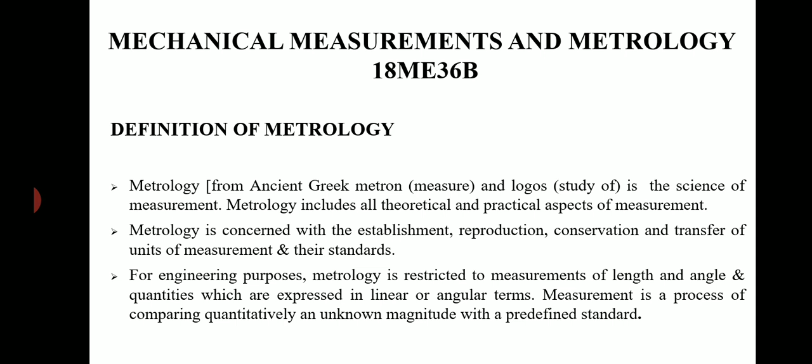Objectives of metrology: to provide accuracy at minimum cost, thorough evaluation of newly developed products, and to ensure that components are within the specified dimensions, to determine the process capabilities, to assess the measuring instrument capabilities and ensure that they are adequate for the specific measurements,

to reduce the cost of inspection and rejections and rework, to standardize measuring methods, to maintain the accuracy of measurements through periodical calibration of the instruments, to prepare designs for gauges and special inspection fixtures.

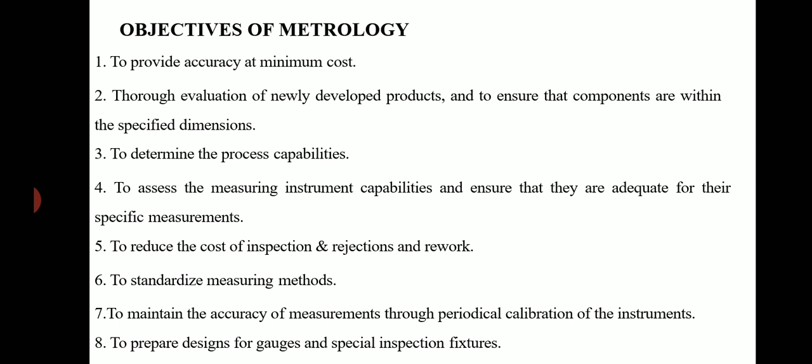Definition of standards. A standard is defined as something that is set up and established by an authority as rule of the measure of quantity, weight, extent, value, or quality. For example, a meter is a standard established by an international organization for measurement of length. Industry, commerce, international trade in modern civilization would be impossible without a good system of standards.

Role of standards. The role of standards is to achieve uniform, consistent, and repeatable measurements throughout the world. Today, our entire industrial economy is based on the interchangeability of parts, the method of manufacture. To achieve this, a measuring system adequate to define the features to the accuracy required and the standards of sufficient accuracy to support the measuring system are necessary.

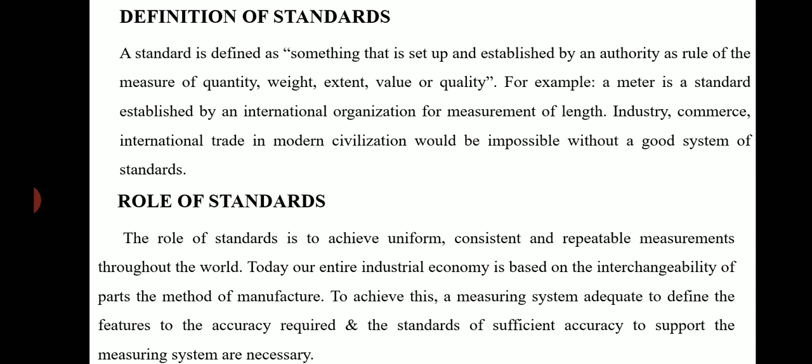Standards of length. In practice, the accurate measurement must be made by comparison with the standard of known dimension, and such a standard is called primary standard. The first accurate standard was made in England and was known as Imperial Standard Yard, which was followed by International Prototype Meter made in France. Since these two standards of length were made of metal alloys, they are called material length standards.

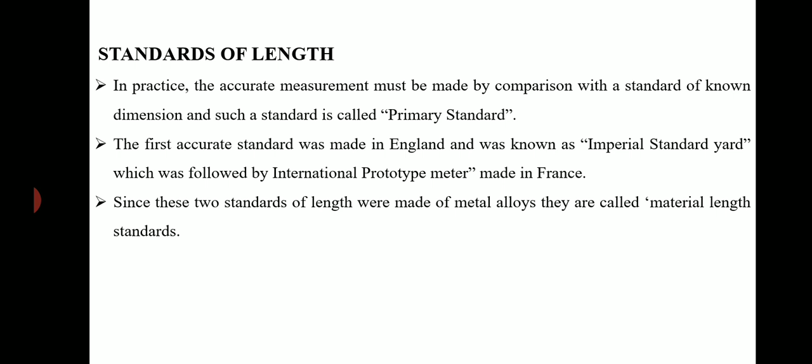International Prototype Meter. It is defined as the straight line distance at 0 degree Celsius between the engraved lines of pure platinum iridium alloy, 90% platinum and 10% iridium, of 1020 mm total length and having a Tresca cross section as shown in figure. The graduations are on the upper surface of the web, which coincides with the neutral axis of the section.

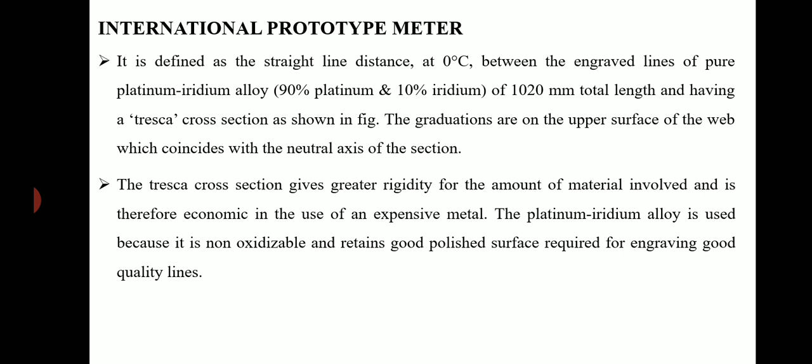The Tresca cross section gives greater rigidity for the amount of material involved and is therefore economic in the use of an expensive metal. The platinum iridium alloy is used because it is non-oxidizable and retains good polished surface required for engraving good quality lines. This is the diagram of International Prototype Meter made up of platinum iridium alloy.

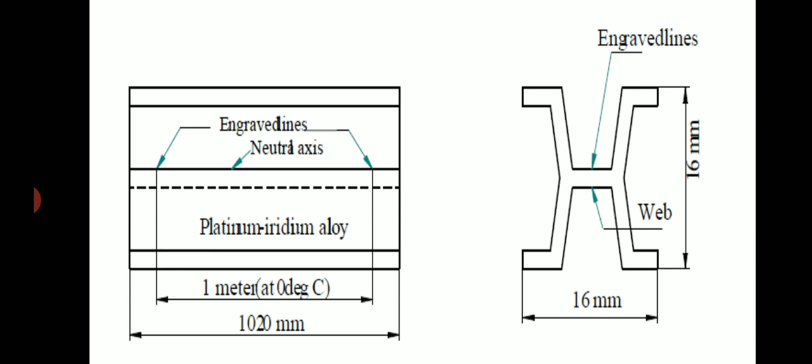Imperial Standard Yard. An Imperial Standard Yard shown in figure is a bronze (82% copper, 13% tin, 5% zinc) bar of 1 inch square section and 38 inches long. A round recess 1 inch away from the two ends is cut at both ends up to the central or neutral plane of the bar.

Further, a small round recess of 1/10 inch in diameter is made below the center. Two gold plugs of 1/10 inch diameter having engravings are inserted into these holes so that the line engravings are in neutral plane. Yard is defined as the distance between the two central transverse lines of the gold plug at 62 degree Fahrenheit.

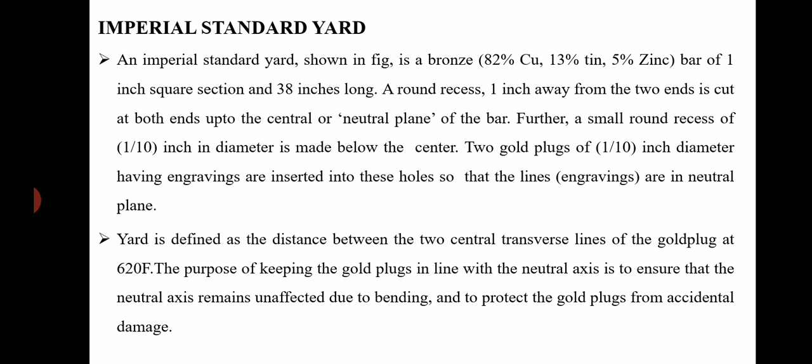The purpose of keeping the gold plugs in line with the neutral axis is to ensure that the neutral axis remains unaffected due to bending and to protect the gold plugs from accidental damage. This is the diagram of Imperial Standard Yard, made up of bronze bar having 82% copper, 13% tin and 5% zinc, at 62 degree Fahrenheit.

Disadvantages of material length standards. Material length standards vary in length over the years owing to molecular changes in the alloy. The exact replicas of material length standards were not available for use somewhere else. If these standards are accidentally damaged or destroyed, then exact copies could not be made. Conversion factors have to be used for changing over to metric system.

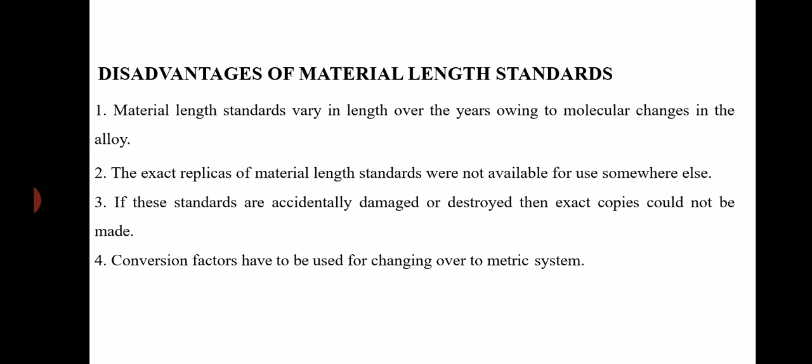Light optical wavelength standard. Because of the problems of variation in length of material length standards, the possibility of using light as a basic unit to define primary standard has been considered. The wavelength of a selected radiation of light is used as the basic unit of length. Since the wavelength is not a physical one, it need not be preserved and can be easily reproducible without considerable error.

A krypton-filled discharge tube in the shape of the element's atomic symbol. A colorless, odorless, tasteless noble gas, krypton occurs in trace amounts in the atmosphere and is isolated by fractionally distilling liquefied air. The high power and relative ease of operation of krypton discharge tubes allowed the official meter to be defined in terms of one orange-red spectral line of krypton 86.

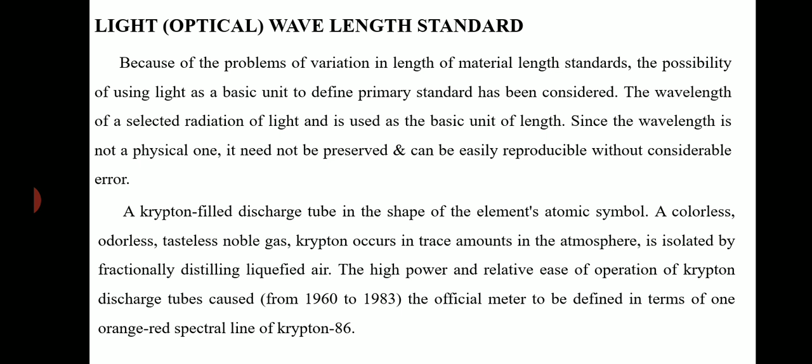Advantages of using wavelength standards. Length does not change. It can be reproduced easily if destroyed. This primary unit is easily accessible to any physical laboratories. It can be used for making measurements with much higher accuracy than material standards. Wavelength standard can be reproduced consistently at any time and at any place.